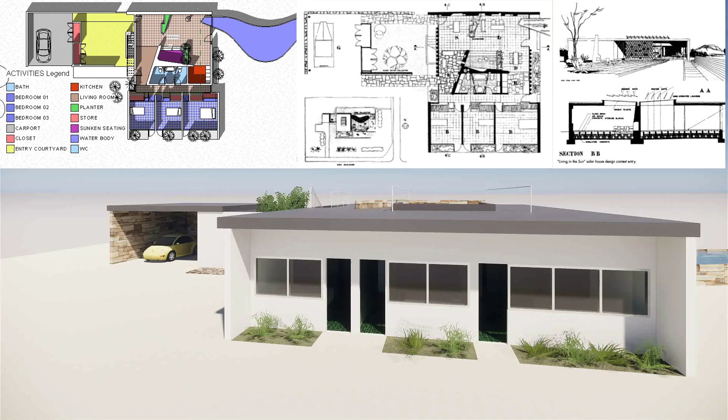This data set has a covered carport on the west, an entry courtyard, and then a living space with a large fireplace, and to the south a separating corridor where there are 3 bedrooms.

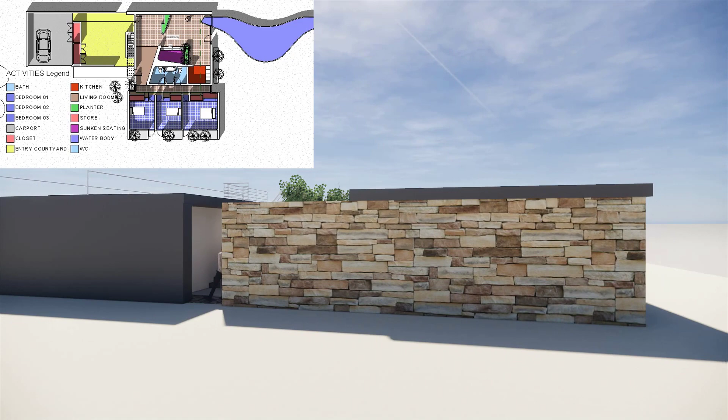The building was designed by Victor Olgyay as a design proposal for a competition based in Phoenix, Arizona. A major feature of the design was to use clerestory lighting and provide louvers so that daylighting requirements could be adjusted at different seasons.

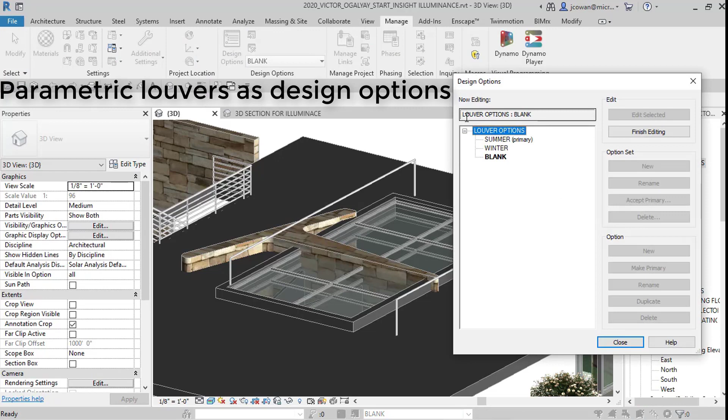The feature in Revit that we can use to help us with our lighting studies is design options, where we can have different settings for the louvers according to winter, summer, fall, or spring equinox. We'll be able to, in views, set the position of the sun and then choose our design option for which louvers we want to have.

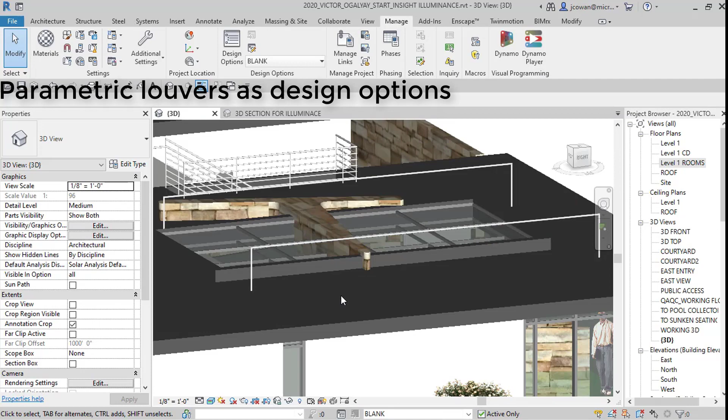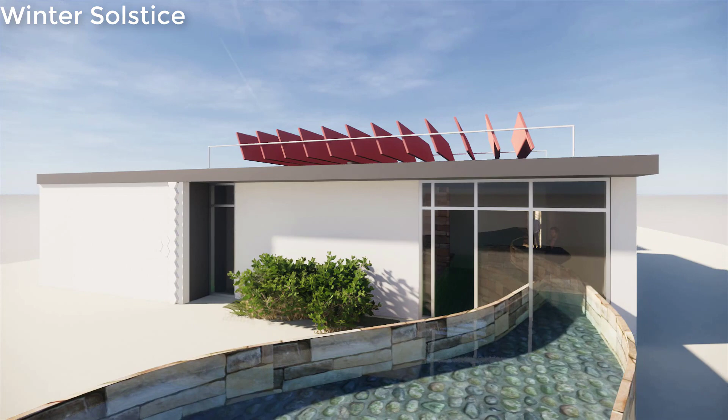On the south side of the building, the roof and side walls shade the facade of the bedroom areas. On the east side, the step in the building shades the entry to the central corridor space. You can see as the seasons change, the louvers are adjustable to control the daylight for the living space.

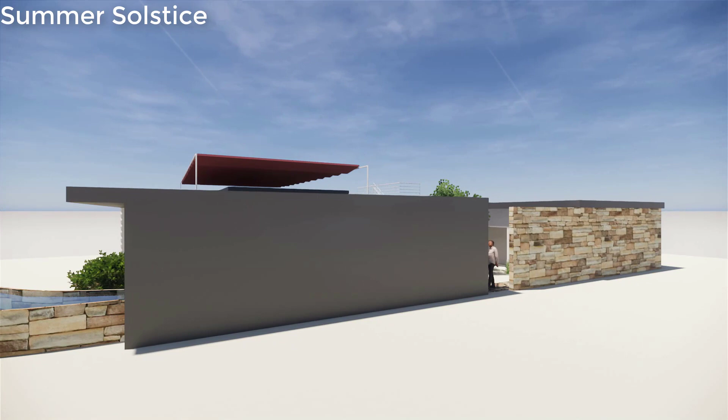The north side of the building has no openings to the interior. Nevertheless, it might be useful to look at the shadow conditions in regard to any related outside activities.

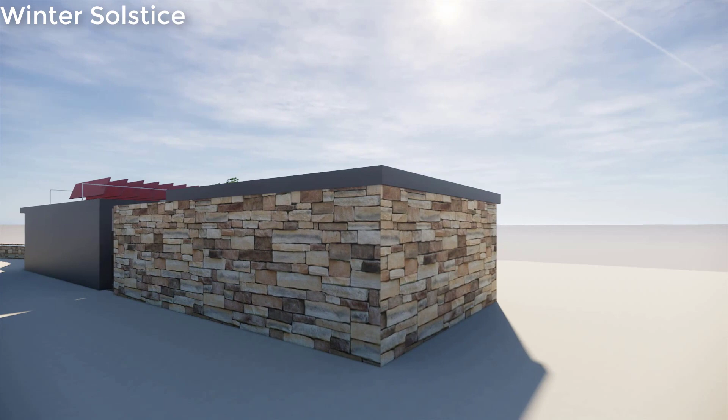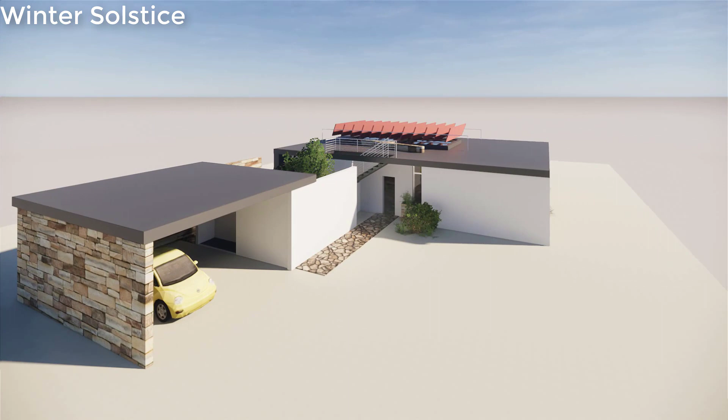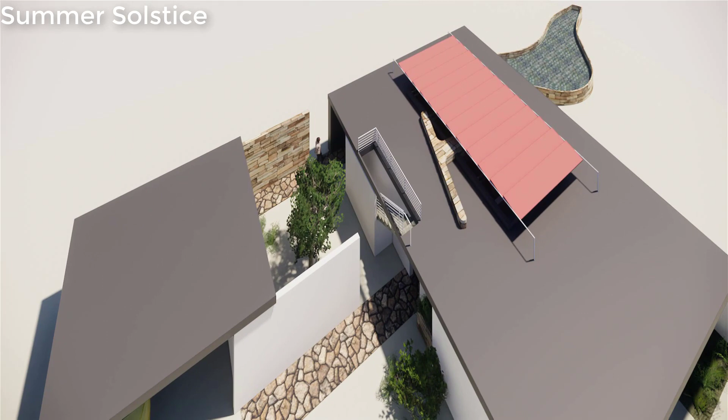On the west side of the building, you can see the carport and the different shading available for different times of the year, and an entry from the carport and how that's shaded. Then on the roof, an indication of how the louvers would be changed to meet conditions desirable for summer solstice, winter solstice, and an average at the equinox. So that clerestory area is covered by these adjustable louvers.

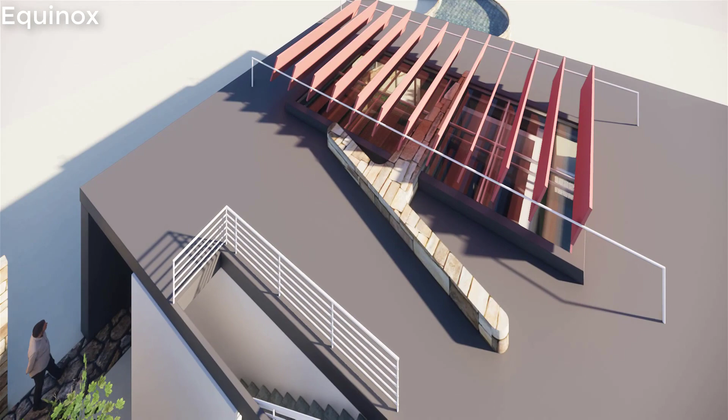The form of the louvers, the angle of the louvers, all of that can be designed as needed, and then we can use them to test the interior lighting conditions.

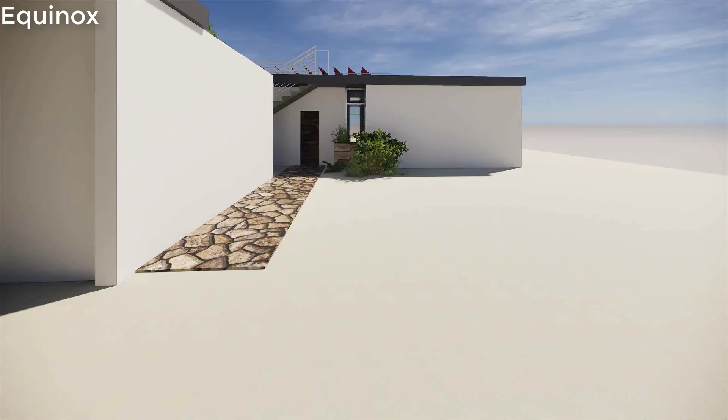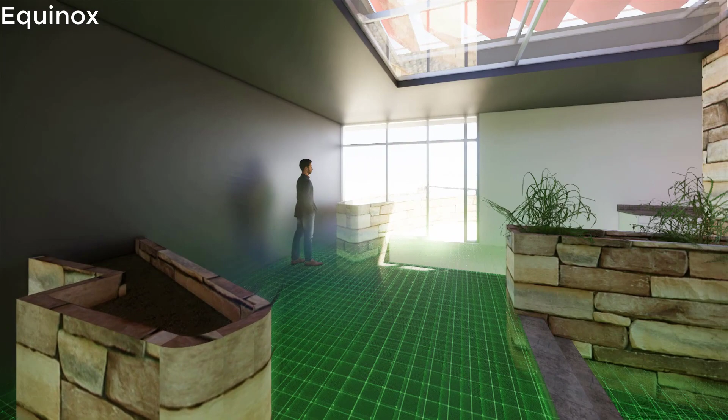We can take a look at the central living space and the fireplace, and above it the clerestory lighting with the louvers. The floor was made of glass blocks, and there's a sunken seating area in front of the fireplace, indoor planters, and a large pool adjacent to the living room.

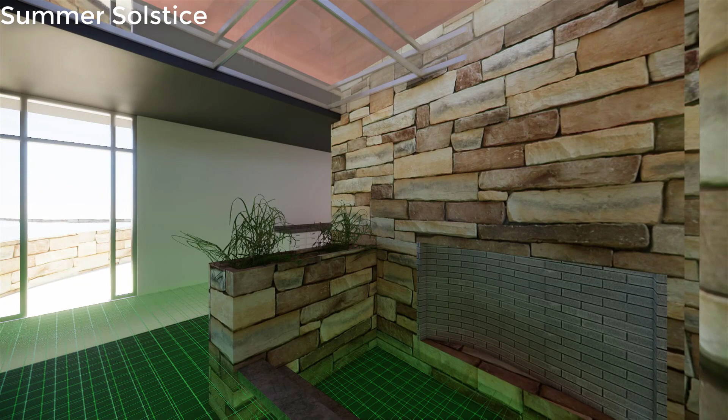The louvers can be adjusted here just for renderings, but we want to be able to measure light values inside this and adjacent spaces.

In this virtual building, we can change the position of the louvers and measure values for illuminance. We can also carry out daylight analysis for LEED accreditation, and do other studies with regard to illuminance on surfaces, for example on the south elevation of the building.

There is an associated food preparation area, a kitchen, that shares some of the light from this overhead clerestory. So we would want to be able to measure light levels, say on those countertops.

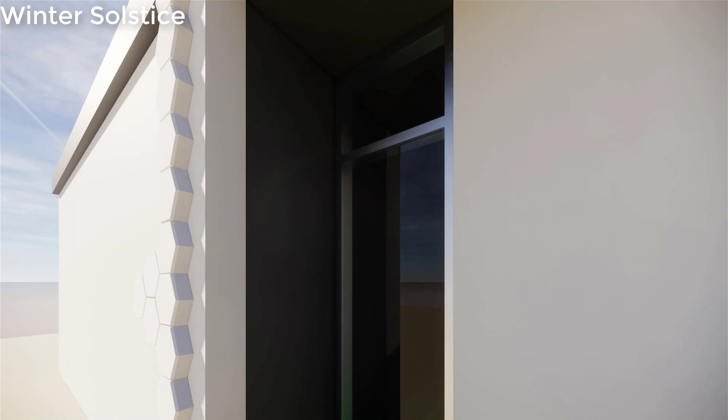The building is separated by a central corridor accessible on the east side. So if we go outside the building, when we come in on this entrance, the bedrooms are on the left. We'll get a glimpse into the bedrooms, and on our right hand side we have other utility rooms, WCs, bathrooms, and those kinds of things.

So that's the tour of the house, and we now want to do studies where we get quantitative results for this interior space.

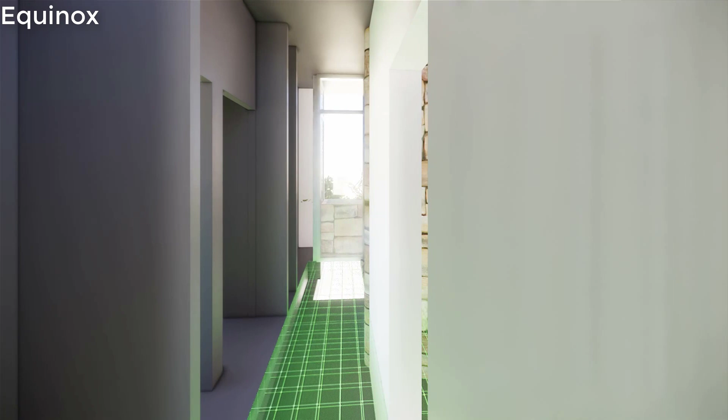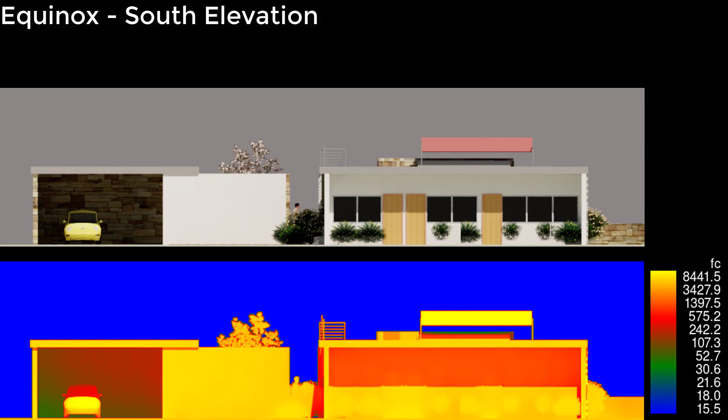So we need to get some quantitative results regarding the lighting. For example, we can look at the south elevation of our building and measure illuminance on the surface, showing the carport on the left and the bedrooms on the right.

We can measure that at different times of the year and get a color readout for a measure of the foot candles on those surfaces.

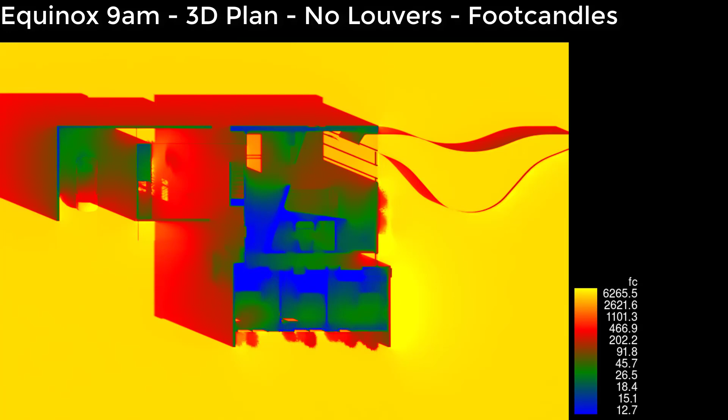So if we actually want something quantitative, we can conduct a study. Say we're looking for 75 foot candles in the kitchen area on the countertops, or 30 foot candles as a general measure inside the building.

We can create views for any time of year with different louver conditions, and produce output that lets us see whether we come close to meeting our goals. This would help us shape the design and change the design as we're working on it.

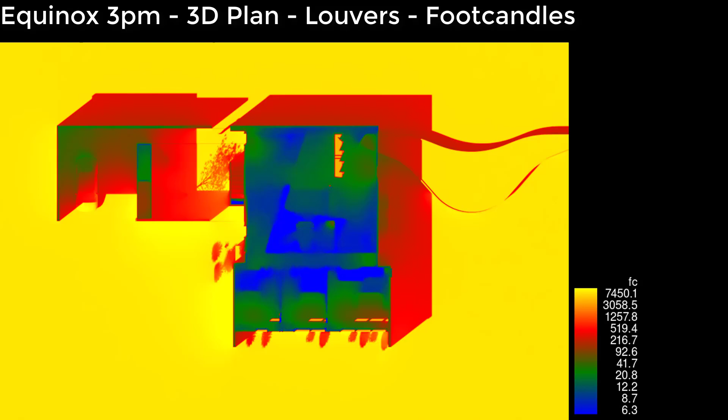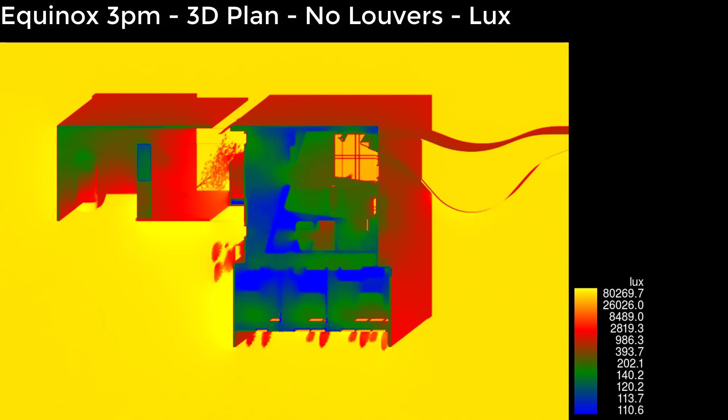We might also be doing this in other areas of the world where we want measures in lux, say 750 lux, or 300 lux. We can run those kinds of studies and then review the end results to see if we're actually close to meeting the design goals we set for ourselves.